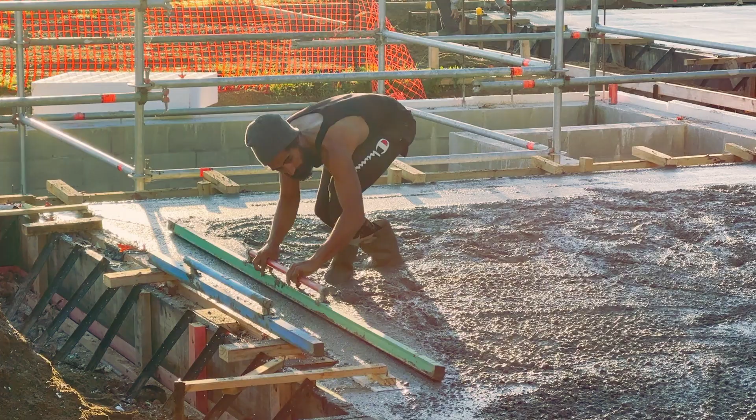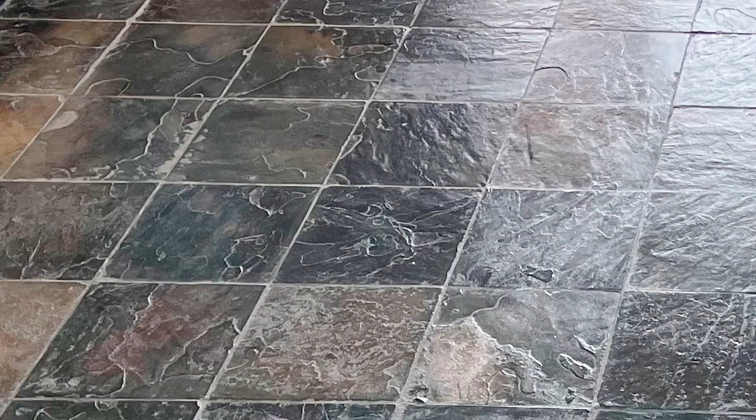Down in the lounge, I feel this numbness creeping up my legs. They're turning into blocks of ice. I put on my slippers, but it doesn't make any difference. Our floor is made of this beautiful slate. It's fixed straight on top of some concrete, and that concrete isn't insulated.

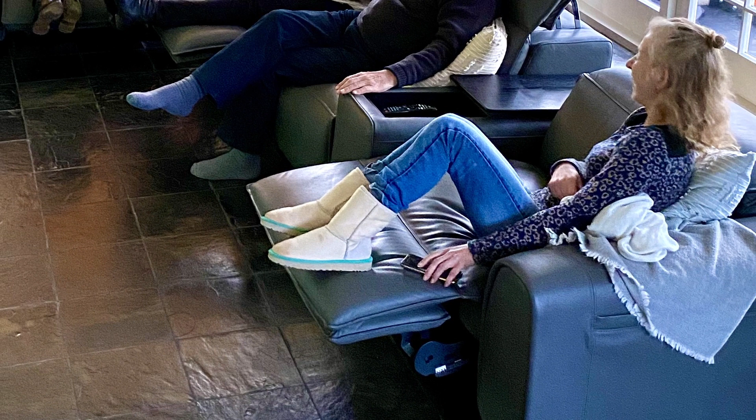The thermal properties of the concrete slab mean that it cools to the surrounding 12 degrees Celsius earth around it. The slate floor sees very little sun, so it never warms. Our guests play a game of the floor is lava, where their feet never touch the ground when they're in our living room. I decide that the best option is to demolish the house and build a new home with a well-insulated concrete slab.

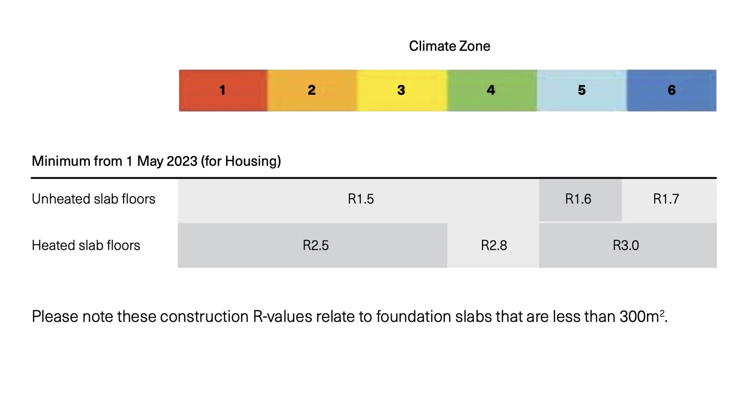Did you know that 10% of your building's heat could be escaping from right underneath your feet? If you want to have a warm, dry, cozy home, the first thing that you probably want to start with is a well-insulated concrete slab. In fact, if you're building a home right now, you'll find that recent regulation changes are going to require you to have a minimum insulation level as part of your concrete slab. The required insulation is going to vary depending on where you live in the country and what your climate is.

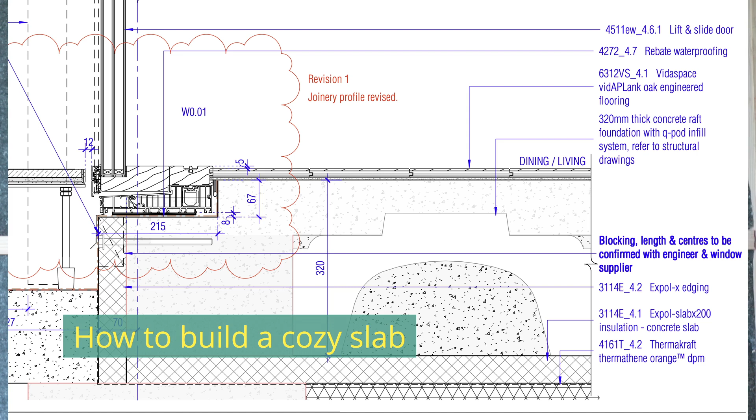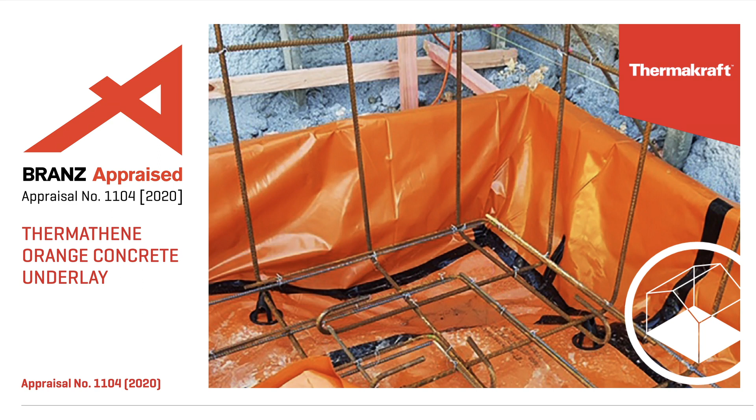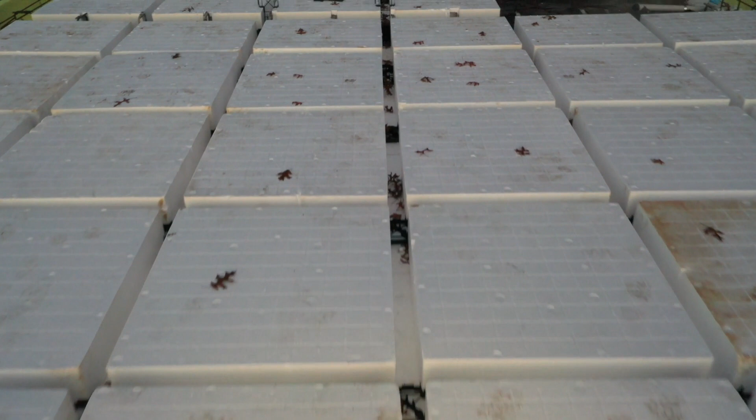So here's how you can construct a slab that will keep your house nice and cozy. First, start with a well-compacted, level building pad. On top of that, roll out a damp-proof membrane that'll stop moisture rising up from the ground into your slab. Isolate the slab from the ground with polystyrene boards. On top of the boards, add chunky polystyrene pods with gaps between each pod. In the gaps between the pods, run rebar. The steel strengthens the concrete and prevents it moving and cracking.

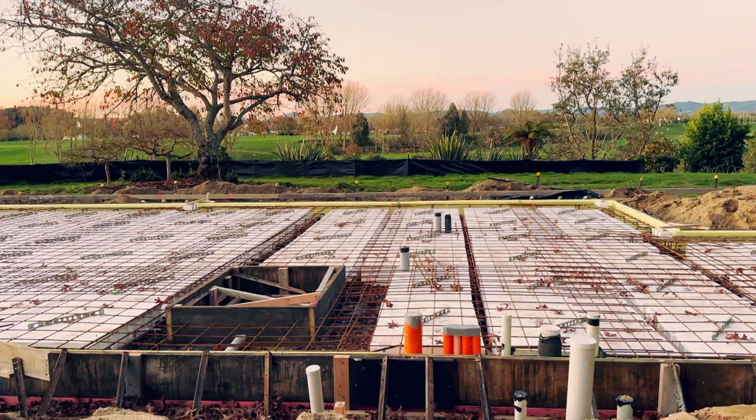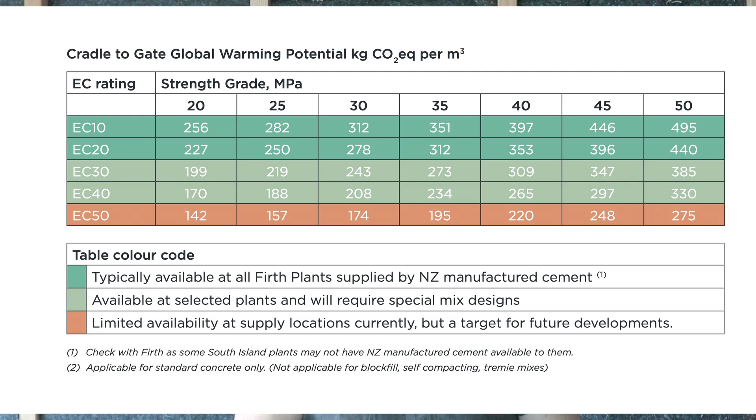On top of the pods, lay out a steel mesh. When you pour the concrete into the insulation form, you end up with a grid of thick, reinforced concrete ribs. You can imagine why this method results in what is often called a waffle slab. Not only is the resulting slab with its ribs stronger than a uniformly thick concrete slab, but it also uses less concrete, so it's kinder to the planet. The concrete we're using for this pour is an eco mix. That means they substitute some of the cement for other materials like slag and ash.

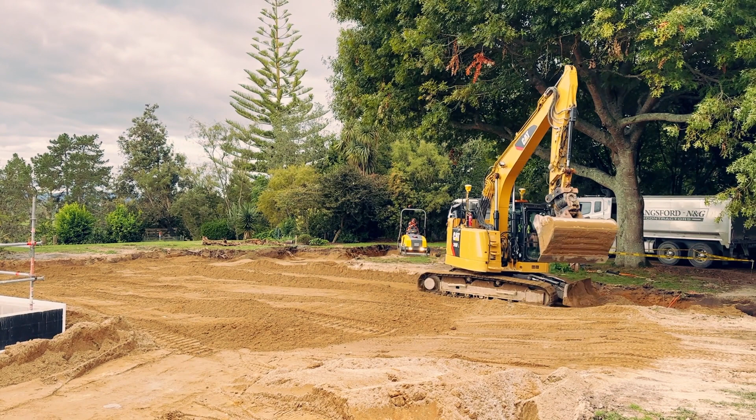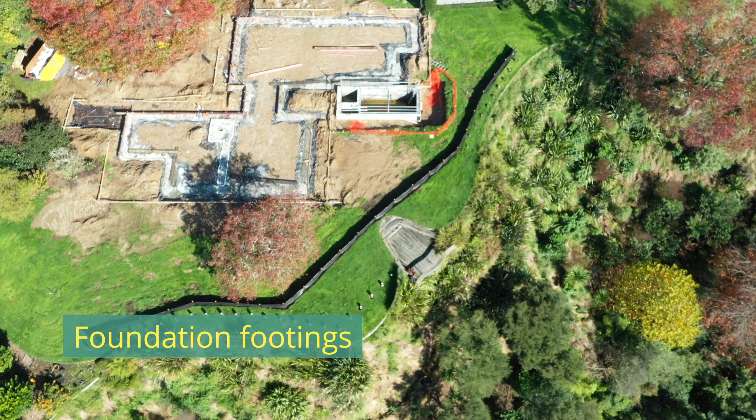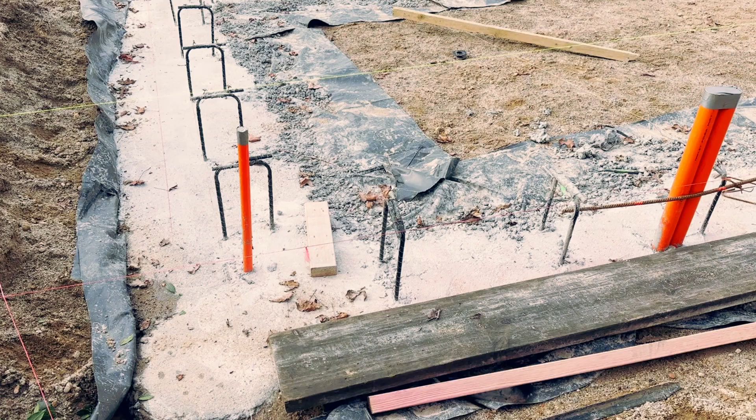The first thing a good foundation needs is a good foundation. Earth movers come in, they dig out and then compact a level building pad. They dig a shallow trench around the perimeter of the pad and fill it with concrete. This creates the foundation footings for the concrete slab. The rebar is embedded in the footings, and later we'll use it to tie the footings to the concrete slab.

We need to allow for toilets, wastewater drains and electrical services that reach outside the building. To do this, we run conduit from outside the building pad and under the footings. The conduit terminates inside the building pad to a position specified down to the millimetre in the plans.

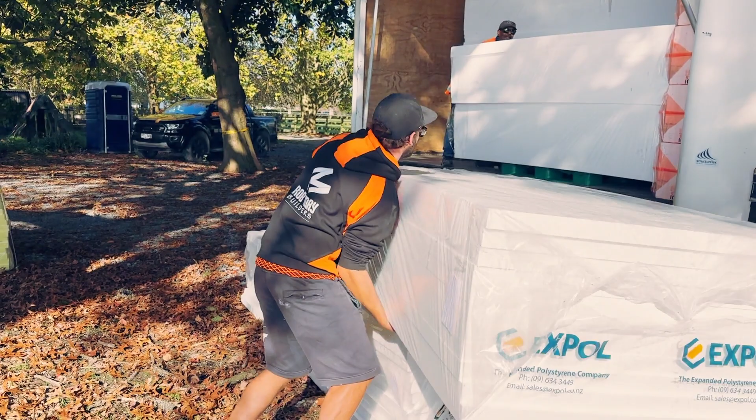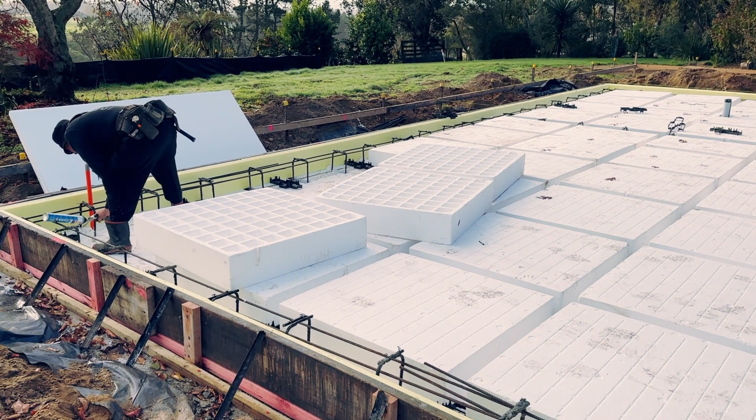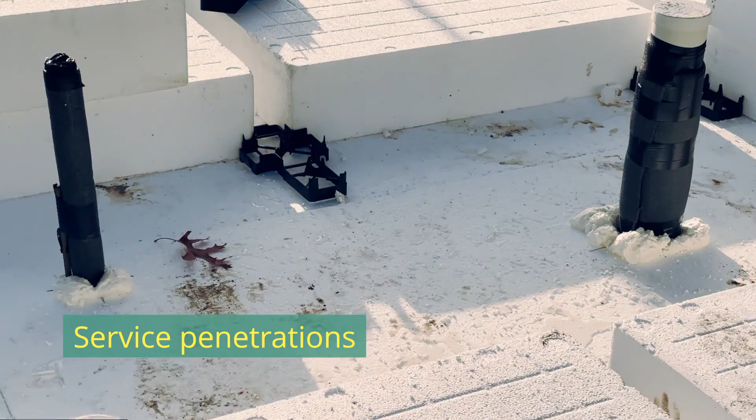80% of the heat loss in the slab is around the perimeter, so we're using the yellow edge insulation. The electrical and plumbing penetrations will extend above the poured concrete pad and will reach under the concrete so that they can be accessed from outside the home's foundations.

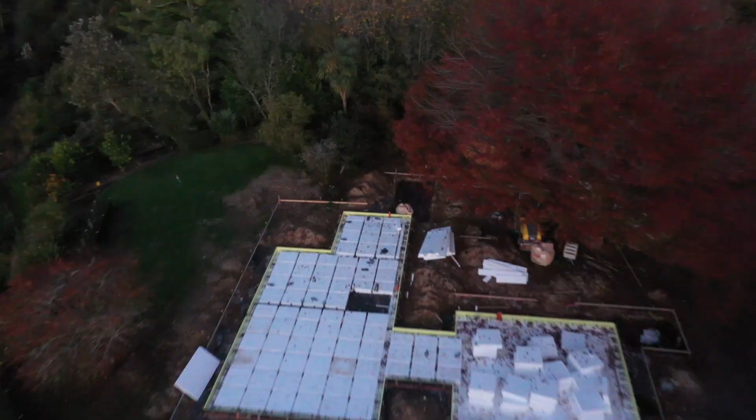The first slab pour is the garage.

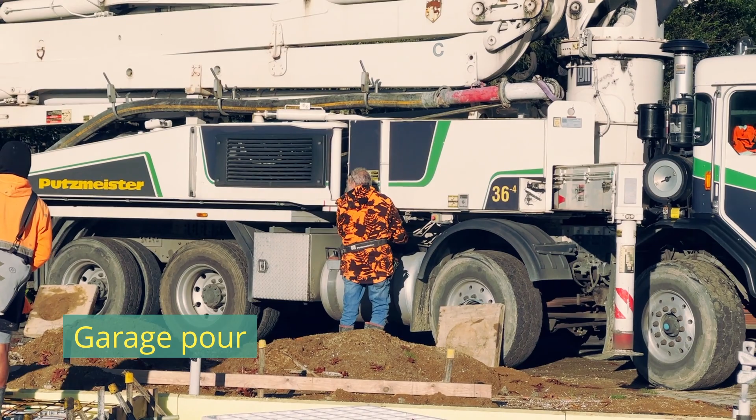I heard 7, but we'll be awake anyway.

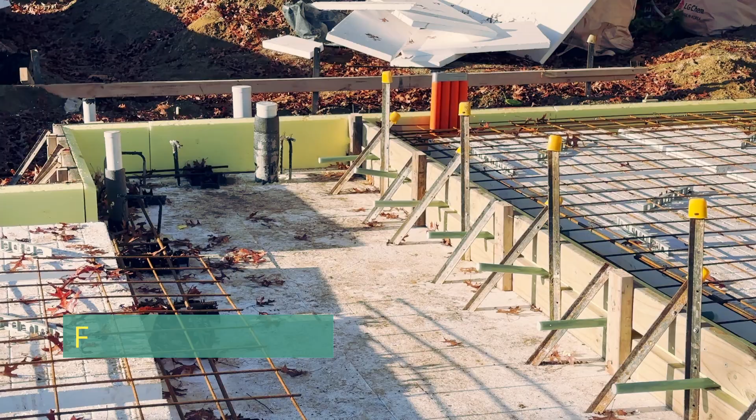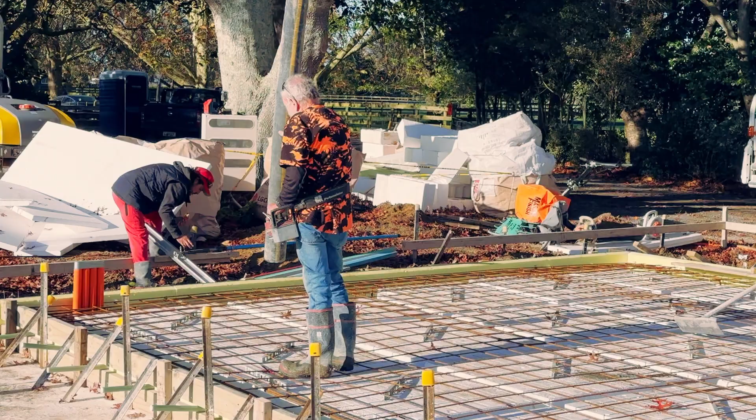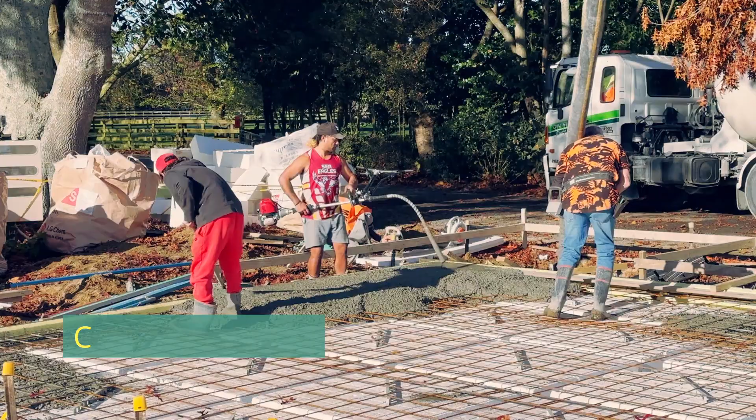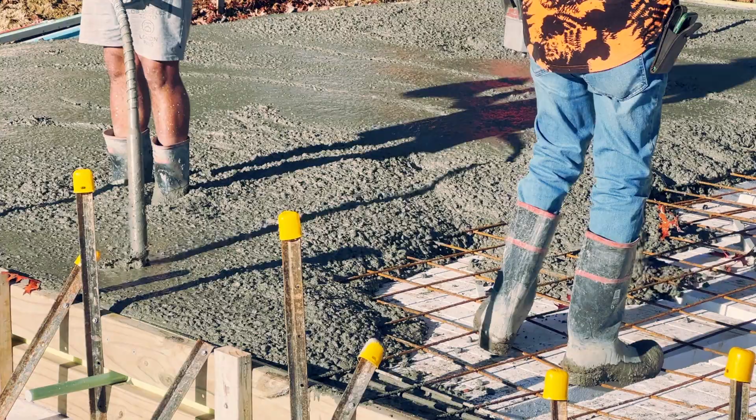The garage is outside the thermal envelope of the house, so edge insulation is used to create a thermal break between the garage and the rest of the concrete slab. In an expensive nod to improve thermal performance, fibreglass rods were selected instead of steel to tie the garage concrete to the rest of the house. Vibration is used to eliminate air bubbles in the concrete, making it stronger. A laser is used to mark a level on the slab.

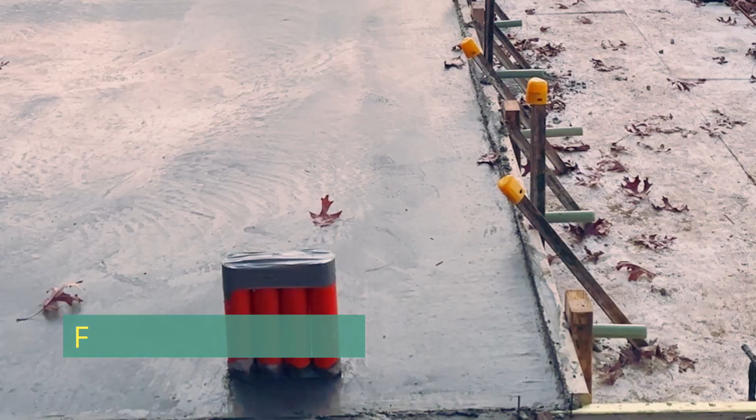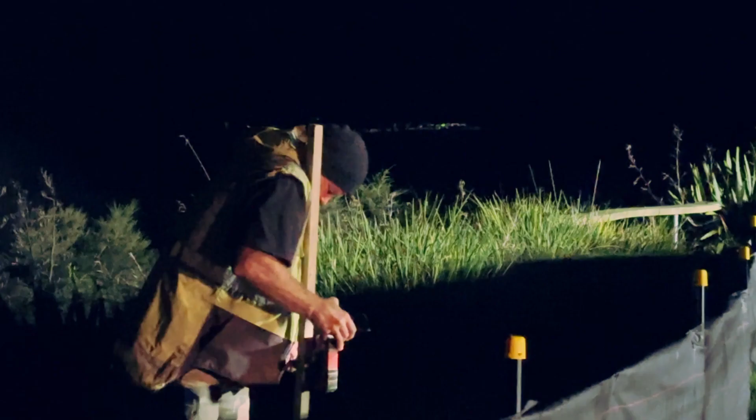The build schedule has been slipping. To help us out, the concrete contractors are arriving on a Saturday morning before sunrise to start on the main slab pour. Even with the size of the slab, it'll be fully poured before morning smoko.